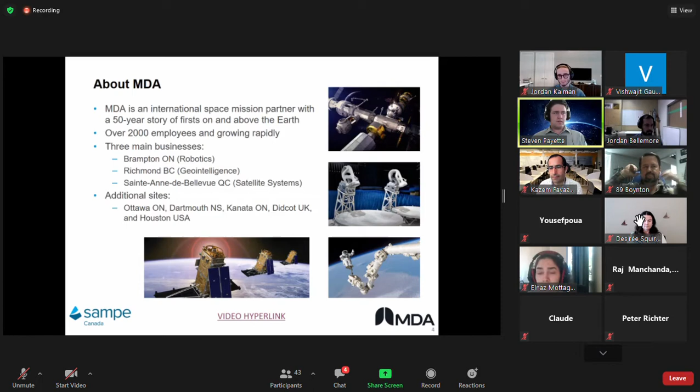So as I mentioned, that was just a little bit about MDA as a whole. It's a publicity video, nothing too technical there. Oh, I'm seeing your Outlook, Jordan. There we go.

Next, we wanted to dive deeper into where Jordan and I work and eventually how composites lead into this. So as we mentioned, we work in Sainte-Anne-de-Bellevue, the Satellite Systems Division. We're a global leader in design, fabrication, and testing of innovative products for a bunch of different markets. In Montreal we have three main product lines: electronics, microelectronics, payloads, and antennas.

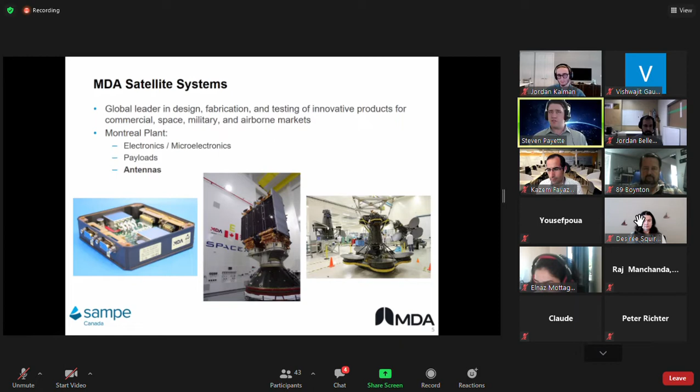Antennas are where Jordan and I work, and it's where you'll start to see some composite structures. Next slide.

So within the antenna division, we basically produce products like what you see in the photos here. When we speak about an antenna, you might think of the antenna on your car for your radio, or a satellite dish for TV before everything went to fiber optic for the most part. In essence, an antenna is a device that converts radio frequency, typically microwave energy, between transmission lines and free space. So what we mean here are satellites with an antenna designed to send information back and forth from ground stations on the Earth to the satellite orbiting above. That information can be used for Earth observation, GPS, television, internet connectivity, government spying on each other, you name it.

The basic components of an antenna are two parts. There's a feed, which we'll show in more detail on the next slide, but it's basically the device that converts RF energy and sends and receives the signal. And then there are curved reflectors that amplify and shape that energy based on the mission. So go to next slide, Jordan.

And where do composites start to fit in? Composites typically are used in two parts of a typical antenna for us, either a structural component or a performance component. When we talk about structural components, we're typically talking tower structures or panels, and their purpose is purely to hold performance parts in place. We'll get into some of the challenges of the space environment later and describe why this is a challenge, but the mission of these structural parts is to survive the aggressive launch environment, and then when on orbit, to hold performance parts in the position we need them to be in.

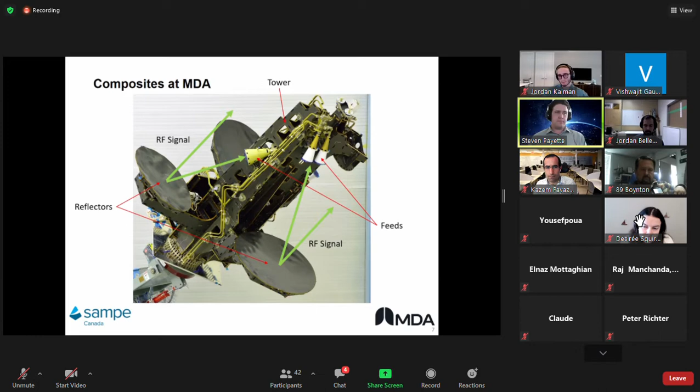Steven's kind of shown you a bit where we're using composites, but why do we really use composites for space? There are a few challenges we have to deal with when it comes to space structures. There are two main events that provide certain sets of challenges: there's the launch itself, and basically the environment while it's in orbit in space.

Launching stuff into space is very expensive. You've probably heard of SpaceX and a lot of this portfolio now of new people who are on the market sending stuff into space. They're bringing down the cost, but it's still very expensive. So mass is a critical feature we have to deal with, because real estate is very expensive within the rocket, and because it's so limited in space, you want to put as much fuel as you can in a satellite so that it can survive and do what it needs to do in orbit. Every gram that you put in space is worth something. So mass is very important.

The launch environment too, you've probably seen rockets launch and how aggressive and really intense those few minutes are. The accelerations, the vibrations, the shocks, and just the noise generated during those minutes are very, very intense. So we have to build things that are stiff, that are very strong, and we have to test all of these things at our facilities mainly to show that they can survive these environments.

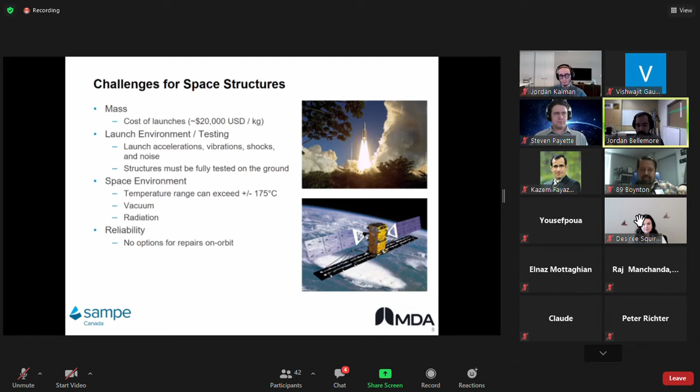So we have a design obstacle that follows. We're not selling millions of cars, we're not selling millions of golf clubs. We're basically selling custom antennas and custom products, and that means we have a very low volume typically. So we can't necessarily invest in the most optimized approach for each design. What we do is we have customers that have unique needs, and we approach these needs with generic tools. So we have what is called our toolbox, or composite toolbox, and we invest heavily in robust and flexible technologies.

An example of this is on the bottom left, we have a composite antenna tower. It's basically a complex looking product, but at the base it's made of flat panels that are machined, that are cut, that are bonded using a variety of products that we have qualified. And we do complex assemblies so that we can come up with different solutions for different customers.

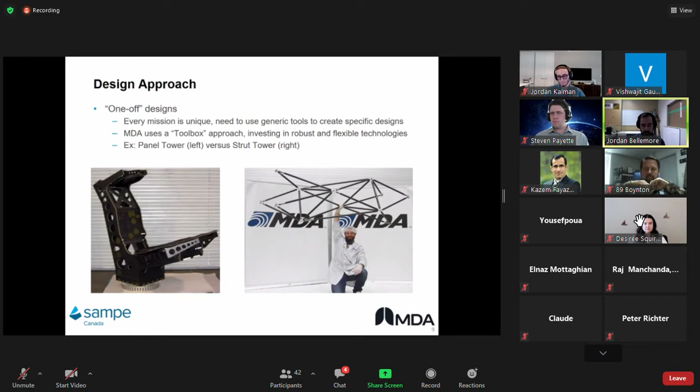On the right, we have strut towers, which is another approach that kind of uses the same type of Lego brick type of mentality. We invest heavily in, for example, composite struts, so tension compression members, and we have metallics that interface all of these struts. Basically, we're able to design a very complex tower using a Lego brick approach where we've really tested the heck out of these tubes. We know how they behave, and then we can design with this toolbox at hand. So we're basically making very complex and unique designs, but using generic products at a base.

From a materials point of view, we're using a lot of carbon fiber, maybe Kevlar, fiberglass. We have a similar approach to materials when it comes to design. Because we have a very low volume but very specialized needs, we end up using very specialized materials, and that means expensive materials. Because of the low volume and specialized materials, sometimes we're put in a situation where it's just better to choose a material that's the best compromise between two jobs, but not necessarily the best for each job. That's something we have to deal with constantly.

It's a constant struggle, but for example, this is a classic example we're showing with some fabric types, fabric weaves. You can imagine in a certain situation, using a tape pre-preg might be the most optimized solution compared to a plain weave fabric. But instead we'll invest in the plain weave, which is maybe more flexible for our needs and more appropriate overall, even though it's maybe not the most optimized.

Another thing that's very important when it comes to materials is the cost of qualifying new materials is extremely high. We spend a lot of time and money making sure we understand the material when it comes to its CTE, how it behaves under temperature, under radiation exposure, under vacuum. Basically everything I was showing before when it comes to the launch and in-orbit environment. So it's very expensive to change any little parameter. We try to make something that's more robust for multiple jobs instead of very specialized for one type of job.

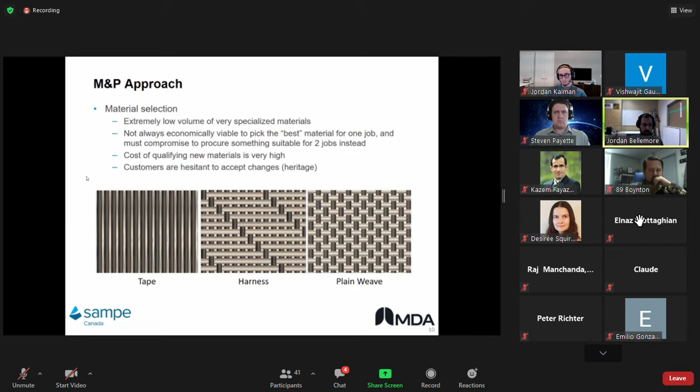So we've dealt with designs, we've talked about some of the materials, we've talked about what we do at MDA. So how do we actually build stuff? We've decided quite a long time ago that the best approach for MDA is to have a kind of hybrid approach. So a lot of the piece parts that we get done are outsourced.

So our main partner is Stelia. We've been working with them for quite some time. They're absolutely amazing to work with. And that's actually how we met Kazem. Kazem worked at Stelia before, and this is how Steven and I know him. There are other few people here on the call today from Stelia, so I'm sure you guys appreciate this slide.

So we've decided to outsource a lot of our piece parts. You can imagine the reflector shell itself is a piece part. We own the materials, we own the processes, but at the end, the touch labor, the curing equipment, the expertise when it comes to storing all the materials and whatnot, that resides with Stelia.

One of the reasons why this is the best approach is, for example, an autoclave. An autoclave is extremely prohibitive in terms of cost for us to own, whereas it makes more sense for a partner like Stelia to own one when they have multiple customers apart from MDA to work with. So Stelia provides us with most of our piece parts when it comes to composites, and then we do the assemblies in-house. Those complex structures that Steven and I were showing get assembled using the Lego pieces, let's say, that Stelia is providing to us.

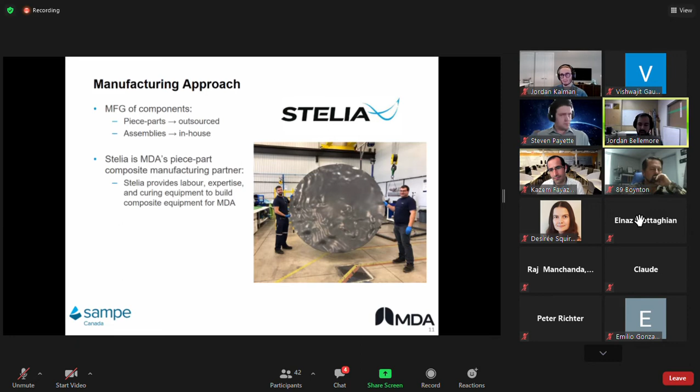Sadly, with COVID, we can't show you the lab in person. So instead we'll show you a video that shows a bit of what's happening inside this lab. It's a few years out of date, but I think it sums up pretty nicely what we've covered in the past few slides, and hopefully you get a better feel for what we do at MDA.

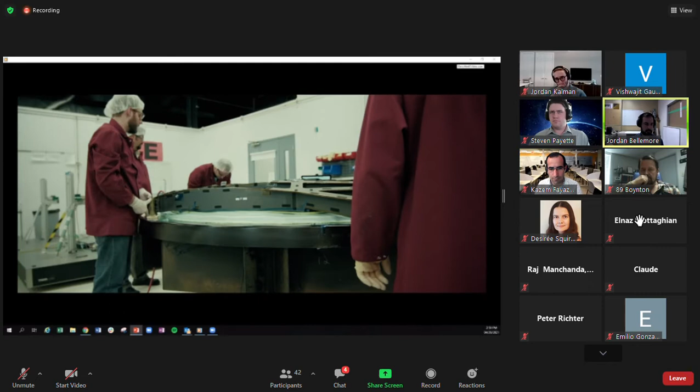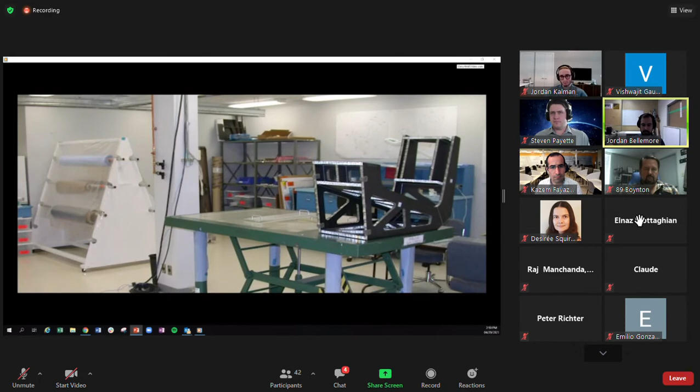Over the years, the Composite Laboratory has expanded to reach a surface area of 10,000 square feet.

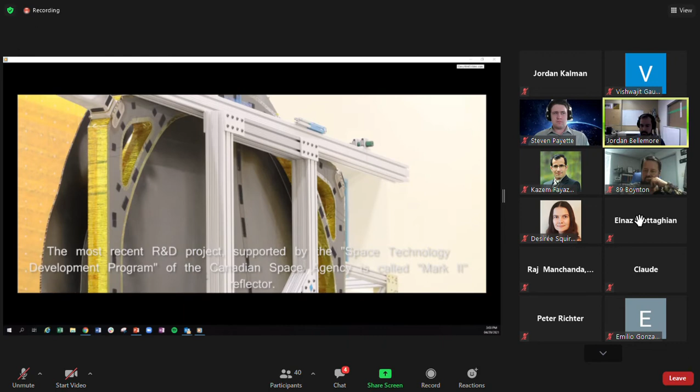An effective composite structure results from skillful fabrication by dedicated assemblers. Close cooperation among design engineers, structural and thermal analysts, and manufacturing specialists ensures MDA products continuously evolve to benefit from emerging technologies while respecting hard-won lessons from our long heritage.

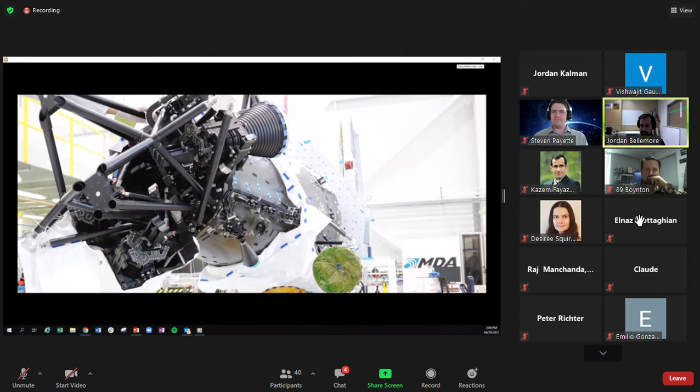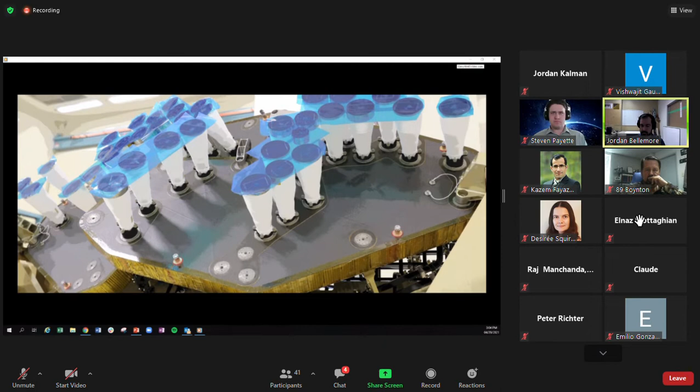A successful design sets itself apart by its clean concept and low feature count. Exceeding customer expectations, delivering technical requirements on schedule and within budget, distinguishes MDA in the marketplace. The laboratory has enjoyed constant growth over the years and loyal customers, which points to a very bright future.

I hope you guys enjoyed that video. I hope everyone spotted a young Jordan at one point in that video, from 5-6 years ago.

The next part of our presentation is meant to give you guys an idea of what the day-to-day of a young engineer at MDA in composites looks like. As we've touched on, because everything is custom one-off designs, we really don't have a very typical day.

Jordan and I are both what we describe as horizontally oriented, so we see every product that comes through the building that has composites involved, which means we work with many different programs, managers, clients, and unfortunately means we're in probably too many meetings.

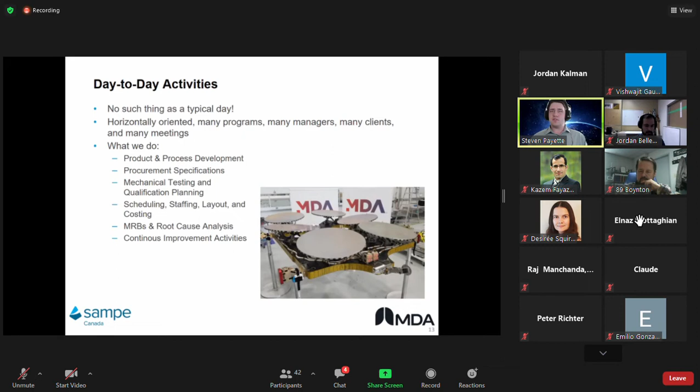Here we wanted to talk about a few interesting projects and challenges we've had in relatively recent history. The first one was for a Saudi Arabian company. As you may be starting to imagine, most projects we work on involve something new in one way or another. This just so happened to be the largest thick panel we had produced up to that time, and it's still actually the largest we've built to date.

This is a product Jordan was heavily involved in the development of early on. Because we're making one of each product, we have to rely on destructively tested coupons produced in parallel with the flight builds to make sure what we're making meets our expectations. There's no lot testing - we produce these coupons in the same cure at the same time under the same conditions to validate our flight part.

In the case of this project, for the thick panel, those work in process coupons gave us some poor results. Our flatwise tensile coupons, a typical test, failed in the normal way but at values about 65% of our requirement. And 4-point bending coupons we performed met the structural requirements, but were giving us a failure mode that wasn't what we're used to seeing.

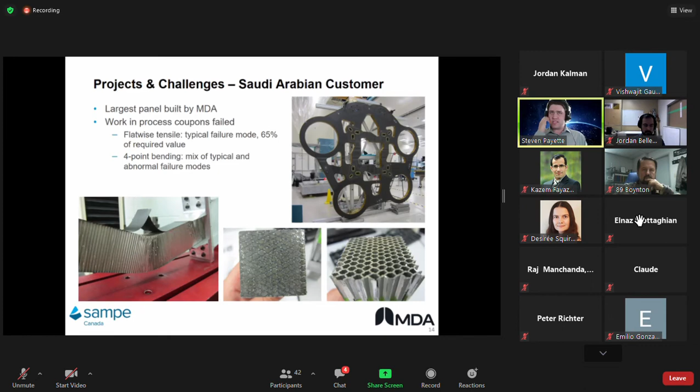These failed work in process coupons led to more than 6 months of intense investigation with our client, our suppliers, and our internal team. There were multiple test panels done, and basically every aspect of the design and production was investigated.

So we typically used a fishbone diagram to help structure these types of investigations. A fishbone diagram basically takes the main aspects related to your problem and divides it up.

So you'll investigate: is there something in the way I'm measuring a property that's wrong? Is there something wrong with the material itself? Am I working with it in the wrong way? Did I deviate from my method or process? Was there something wrong in the lab at the time, like was humidity off - environmental aspects? Did somebody just make a mistake, was there a technician on the floor who did something wrong? Or if there's a machine involved, did the autoclave malfunction in some way?

So that's a typical structure that we'll use to try and address these big problems, to make sure we're not overlooking something. Next slide, Jordan.

The lesson here, which kind of drives me insane, is we never found the root cause. We were never able to definitively pin down exactly what went wrong. In the end, what we found out is that for whatever reason, we couldn't produce that size of part at that facility, on that table, in that autoclave. There were different combinations of things that did work, but we weren't able to figure out why the full-scale part didn't.

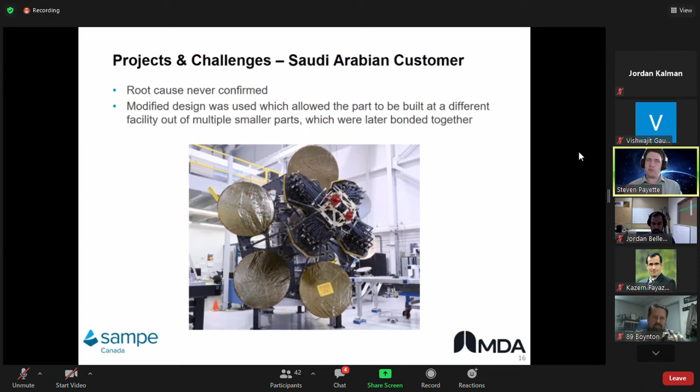So the picture you see here is the final integrated antenna. There's that large structure all attached to that base panel, which you can see behind those four reflectors. Next slide, Jordan.

Here's another program near and dear to me, one where I was heavily involved in developing the Strut Tower product. This project for a Brazilian customer was our largest and most complicated strut tower to date. As Jordan mentioned, that's a tower formed entirely out of two-force members joined by metallic parts—composite tubes that link metallic points from one section to the next.

This program also featured our largest, and our only, 3-shell Mark II built to date. In the video they talked about the Mark II as a recent product, something new to us in the last 4 or 5 years. This was the only instance where we built one with 3 shells integrated onto one pallet. Both were extremely complicated products from our point of view. The interesting thing is the problems we ran into, which you'll see in the next slide, were in some ways extremely basic and had nothing to do with the complexity of the products or the composites processes involved.

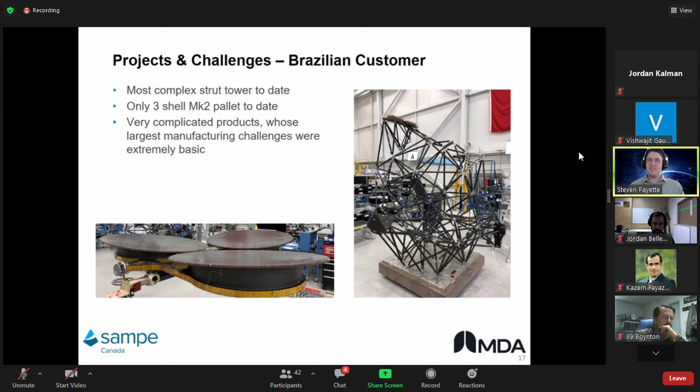The first problem, as silly as it's going to sound, had to do with threaded parts that didn't mate properly. It's important to remember that most composites products will interface with metallics somewhere along the line, and there's a whole slew of problems that can show up on the metallic side too. In this case, we couldn't seat two metallic parts together because of poor tolerancing on the drawing and a lack of communication with the supplier about which dimensions were actually critical to us.

Unfortunately these weren't off-the-shelf bolts you could just replace—they were unique, complex metal parts with a 12-week lead time, costing $8,000 to $10,000 each. So there wasn't a simple 'grab another one out of the bucket and keep going.' We couldn't move forward with the build knowing there was this gapping, since the structural model couldn't tolerate improperly seated metallic components.

The second problem we ran into on this project, as silly as it's going to sound, was a technician—this can happen to anyone—who had a screw he was trying to put into a part, and it cross-threaded and jammed. He had a bolt jammed in another metallic component bonded to our composite panel. In trying to free the bolt, he grabbed a can of effectively WD-40 lubricant and sprayed it into the part to loosen the threads. It got the bolt out, but led us into a large, painful investigation with a very picky customer about the impacts of that lubricant inside our panel structure.

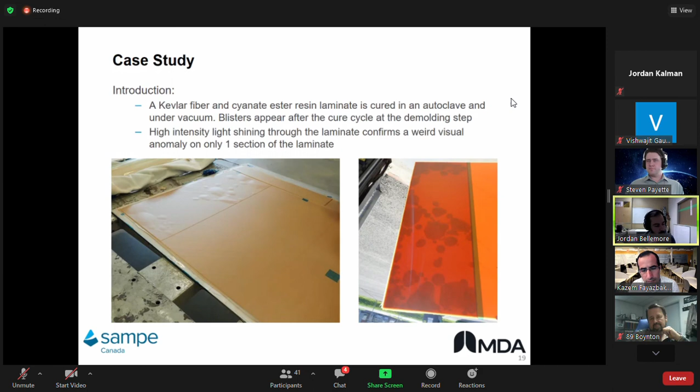And so we take a look, and there are a few facts that come out of this. The cure cycle itself went well. Everything was per spec. The material that we bought was per spec. There were no anomalies at that level. The layup was done on a flat aluminum plate, which was normal. The blisters are occurring on both the tool side and the bag side of this laminate.

We performed mechanical coupons on sections of this laminate that were of a lower ply count, and they're good, they actually meet our requirements, exactly where we want them to be. This laminate has various ply counts: there's a 6-ply section, a 14-ply section, a 16-ply, and a 24-ply. But the blisters only occur on the 24-ply section.

Knowing this, what do you do next concretely? How would you investigate this, and what is your next move? That's what we want to know.